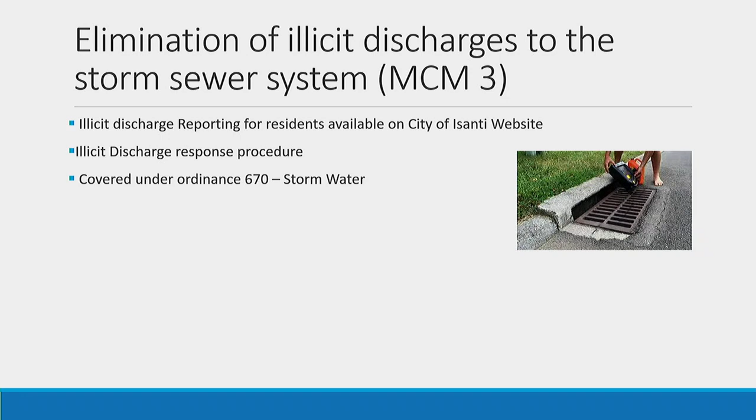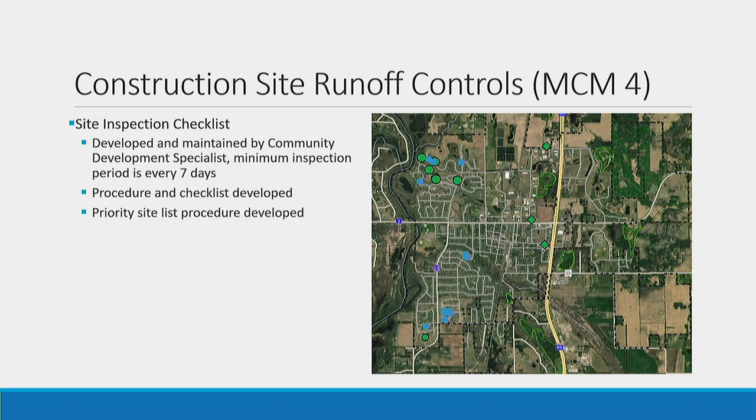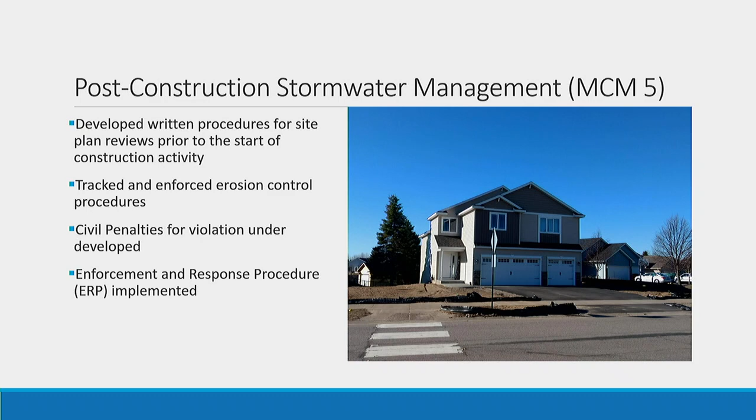And then we make sure that all of our enforcement happens. There are penalties that we did adopt in 2019, part of our enforcement and response procedure. We are now actively doing that. So what we do is we notify them, and they have 24 hours to come into compliance, and we can fine them if we choose to do so.

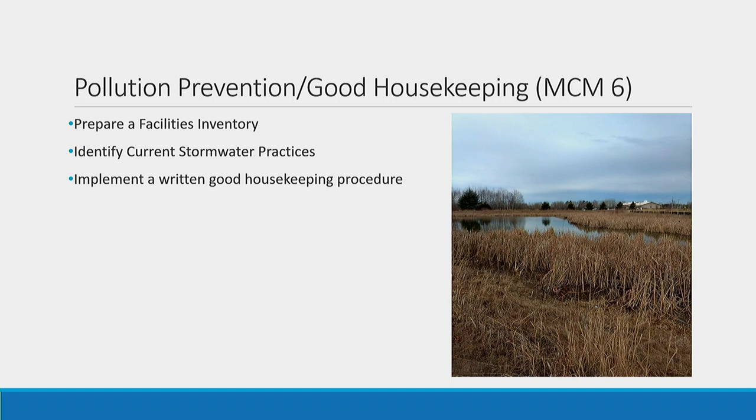Again, just kind of talking about what some of our good housekeeping is. It's just part of our permit, things that we need to do in order to maintain our MS4 status.

Some of our future work that we're looking at doing is we're going to continue to implement our SWPPP. We're going to look at some different grants, assessments that we can do through that. And then we just kind of listed our partnerships. Bolton and Menk is our big partner in this. And then we listed our developments that are going on that we will go out and enforce. We do have a partnership with those builders, because they know the rules and they know they have to comply, and that keeps all of our water clean and safe.

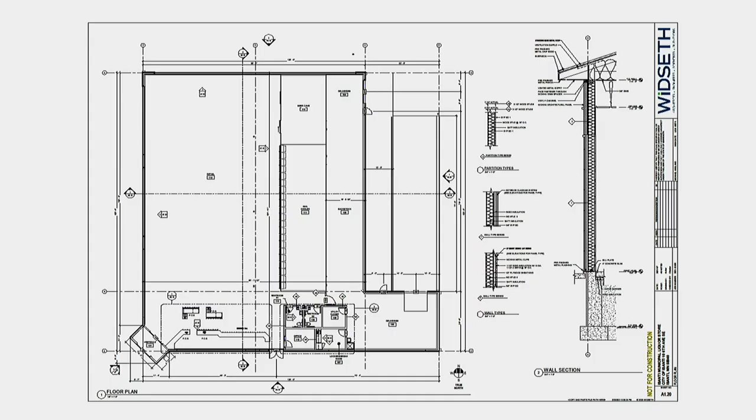I just have one question. For the outside of the building, the vehicles would park on the west side and the south side? Yes, the west side will have the parked regular stalls. Is there a landscape sidewalk area there? Yes, there is a little bit of a landscape sidewalk area, so you don't have to worry about someone possibly hitting one of the parts there. There's a little bit of a barrier. I think we learned our lesson on that. I just couldn't see, but that's all. Looks good. And there's quite a deep sidewalk there also.

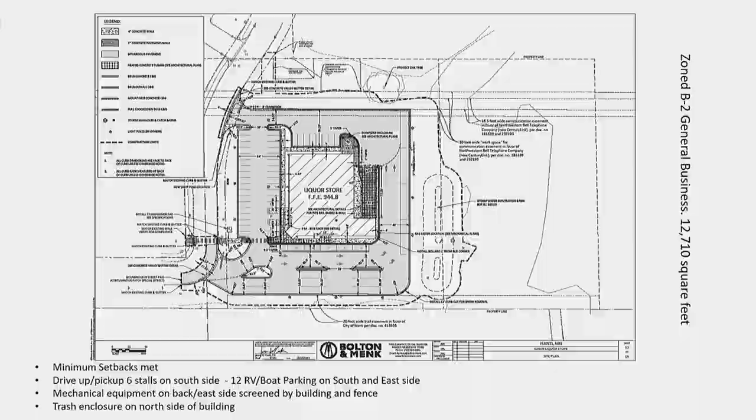Any questions, comments, or concerns by the council? Make a motion to approve. Second. Motion to approve by Councilman Lundin and a second by Councilman Collison. All in favor, say aye. Aye. Opposed, same sign. Motion carries 5-0.

Thank you, Ms. Selman. Moving to K3, the street light infill plan. Resolution approving a 10-year street lighting infill plan.

There's an A and a B to this one. I'm just going to read B as well. That is a resolution approving of street lighting infill for 2021.

Thank you, Mayor Johnson, members of City Council. At the last COA meeting, you had asked that I reach out to Isanti County to see if they were willing to share in any of the costs for the lighting along Heritage. They're not willing to share in any of those costs. Their reason was that it's primarily to light the city sidewalk, and they would provide the easement. So I'm looking to see if you want to move forward with the street lighting infill as provided. That resolution would be the resolution to do the street lighting, and the other one would be to do it as this year's street lighting.

I make a motion to approve. Second. Motion to approve by Councilman Lundin and a second by Councilman Collison. All in favor, say aye. Aye. Opposed, same sign. Motion carries 5-0.

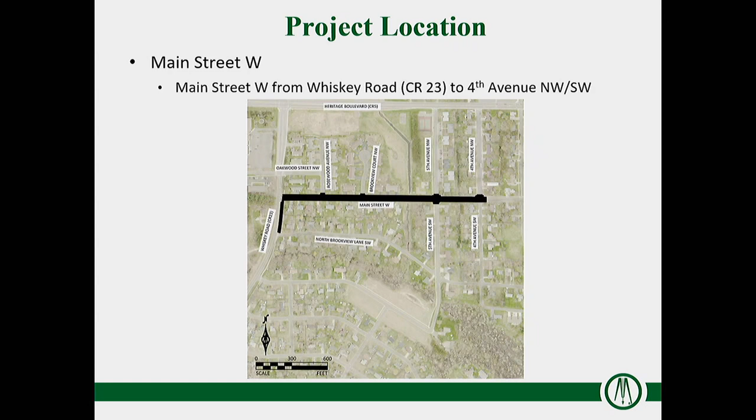That was mainly the limits of our project. If you also see the little leg to the south along Whiskey, that was more or less the side evaluation of a drainage issue right at the intersection of Main and Whiskey that we also did. We'll discuss that shortly. So the existing conditions: that segment of street is a state aid route, so it is eligible for state aid funds. It was rated a 4 out of 10 in the last 2020 rating evaluation, which is below a recovery type level of condition. So...

It was time to evaluate what type of reconstruction was going to be needed. The water main was installed in 2 or 3 different phased installations. The first block and a half on the east end was done in the original install of the city's master system in 1975-76, believed to be cast iron. The rest of the water main was installed in '92 and is ductile iron pipe, and we've had really no issues on breaks or failures on that.

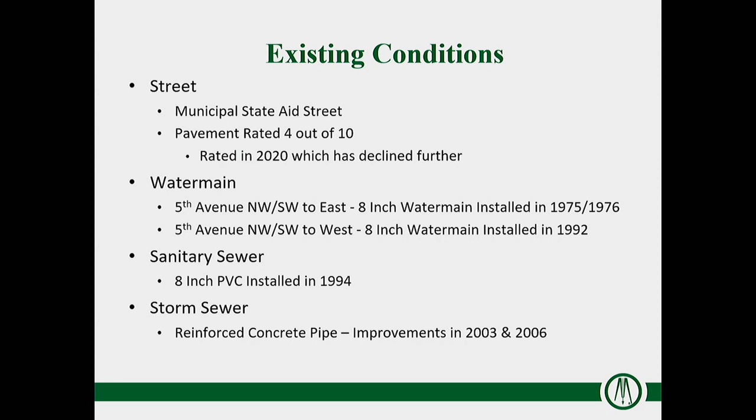The sanitary sewer went in on its own entirely separate project in '94, located actually behind the walk on the north side of the street. And the storm sewer, which was where that drainage problem was on the west end, went in actually in 2006. So quite a few different pieces of projects that cobbled this together.

So the proposed improvements were identified to be running a reclaim machine to blend up the subgrade, or the class 5, with the pavement, replace all the curb and gutter because there's too many intermediate failed curb sections to patch back, and then replace the sidewalk along the back of curb in those areas. We did look at the idea of narrowing the street.

It turned out to be 2.5 feet narrower would still be meeting state aid requirements for parking on both sides, taking it down to a 34-foot face-to-face wide street, and then trying to add a grass boulevard on the north side and narrow the walk down to 5 feet, thinking that would be a cost-effective solution to reducing city cost.

But it actually turned out differently. If I go to the next slide here, the westernmost block of the project on the north side had new sidewalk and curb go in on that 2006 street project. So to leave that in place was more cost effective than to mess with street widths and reconstruct all of that, especially when it's so new.

Also, because the current layout has catch basins on the north curb line, if we tried to narrow it, we would also have to rip out catch basins that are in perfectly fine shape, move them 5 feet or 3 feet, and reconstruct them. So once all those costs added up, it actually turned out to be slightly less cost effective to try and narrow the street.

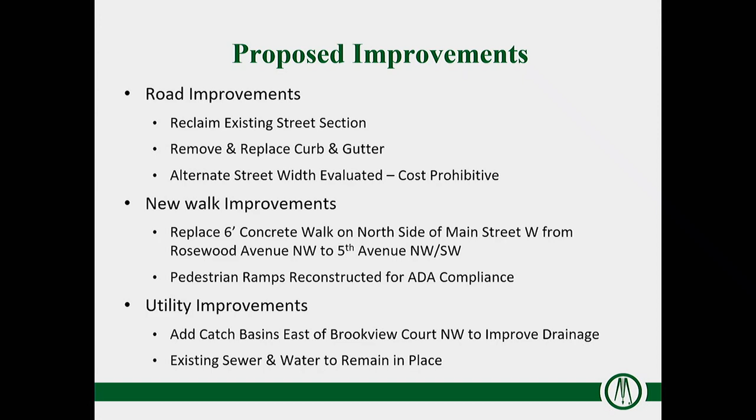Same curb? We'd switch to that surmountable type curb on that block as well.

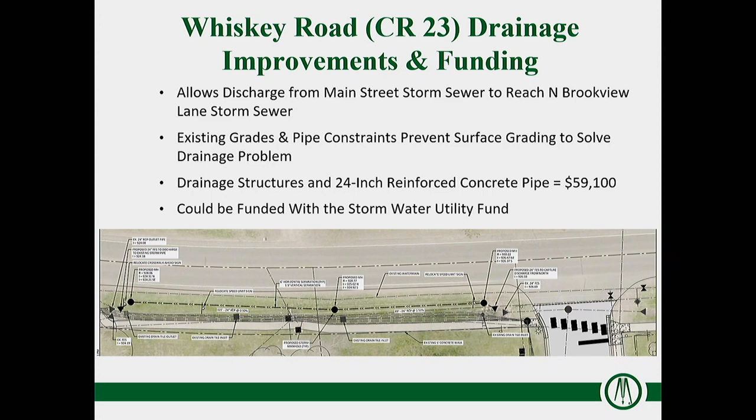So that's kind of a side element of this whole report, because the main purpose is Main Street, and what we're getting into is the costs and assessments. So, back to Main Street, the cost estimate for the total project is $674,000. The original budgeted amount, I believe, was 663-ish, so it's slightly over.

But when we get into the next pieces, the state aid element is: this entire project is state aid eligible, because we're not doing private or city sewer or water, which are the non-state aid type elements. So if you recall, back in February, we already did the advance request to let the state know that we may want to use those funds. It was a highly restricted advance attempt to get money, and so the fact that we qualified to get it was one of the reasons we were moving forward here. And so basically all those dollars are going to end up being accessible, or fundable, through the state aid program.

That's the advance that we requested. It was slightly less than this total project cost that we have determined at this point, again, without actual bids and whatever. But the way state aid works is we can get as much as we're eligible to get right now, and we can request the remainder, if there is a remainder, next year or the following year when the funds are available. So it never technically has to come out of the general fund as a permanent thing. It'd just be whether or not there's something that has to get worked out to float the money until the state aid funds become available again for us to draw off of.

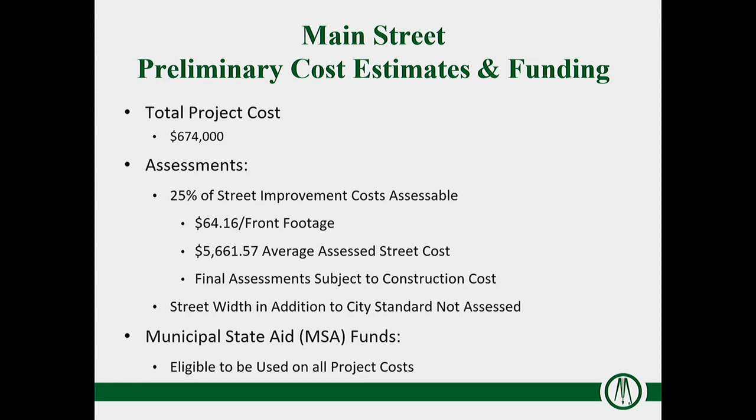And so all of those costs, the average assessment number is estimated at $5,661. A piece to add to this is we did restrict how much of the total pavement is being assessed, in that the policy says any sizing over the city standard size road wouldn't be assessed. In this case, the 34-foot street width would be the city standard for parking on both sides and the two lanes. So that kind of 2.5 feet of street width isn't assessable, or wasn't factored into the total cost that is assessable to be reduced at this 25%.

So it's going to be a little less than that? No, that's already factored in. I was just sharing that it wasn't, got it. Just the total project cost, okay, 25%. So there's a strip that is the final number, though.

Okay, and as we discussed before, it could come down depending on what the bids come in at, absolutely. And with the final design, these are still just estimates on general quantities on things, because we haven't done the final design. So even the actual estimate of the final quantities in the plan set may come down. But that's just to start the conversation, I guess.

So moving on to the schedule. As we talked before, there's interest in holding an open house. It's not part of the assessment process that's required, but it's certainly a good idea to get everybody informed and get insight. So we propose to hold one on March 25th to get some public input. And then the next real step in the assessment procedure would be to conduct the public hearing, which we're slating out as April 20th.

At that time, if the city would want to move forward, we would also plan to have the plans and specs ready to be able to be advertised and approved. So the council could make the motion to move forward after the public hearing with going out for bids. We get bids in May and still be able to construct the project in the summer. It's only probably a 2-month-long project, so we'd have the leeway to start sometime between June and August and still get done by the end of the construction season.